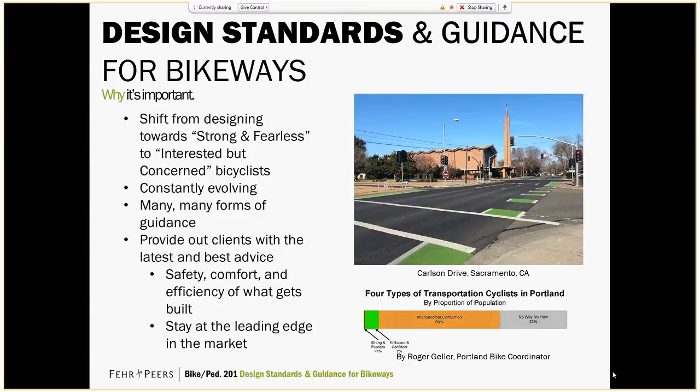Thanks, Charlie. I did want to start out by talking about what the design process is, and how do we go from something that's proposed in, say, a master plan or a specific plan that starts out at a very high level, to how that actually gets put onto the ground. So you start out with a proposed project that doesn't have a lot of detail, but the general concept is understood in, say, a bicycle master plan or a general plan. But then that needs to be taken to the next level and really look at more of the details and start figuring out what that means.

That's really where we talk about conceptual design. These days, a lot of times we'll include some conceptual designs in our master plans. The idea is that we make these more implementable and more focused on projects that can be put into place. The concept plan is usually defined by an Illustrator-type graphic as opposed to, say, an AutoCAD drawing. So it's a higher level, not necessarily to scale, done over the top of an aerial. But it does start to get into more of the details than are just outlined in the broader plan. The major elements are decided in this phase—you'll usually see cross sections identified, and some of the intersection treatments start to be looked at.

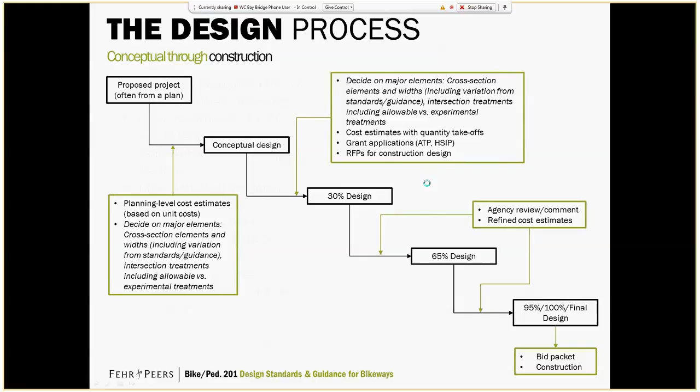So in theory, I have control. We'll see if it moves forward.

Okay, so this is just, again, an example of the concept design—you can see the illustration here. This is from a project on Telegraph Avenue in Oakland that we took all the way from the planning stages through to construction documents. Here it's really just an Illustrator document. You've got some of the cross-section elements called out, so you know how wide this thing is going to be and that it will fit within the curbs. But otherwise, it's pretty general, very illustrative of the concept that you're trying to convey to the public—that's important, that these graphics communicate that to the public. At this stage, you might include things like bike boxes, and we'll get into all these details later, showing crosswalks. It's somewhat vetted in terms of whether this is going to work, but not to the level that you need for the 30% design.

So 30% design is really when we pull it into AutoCAD and start to scale everything off, do all the tests that we need to make sure this is going to work, really start to ground truth this and make sure that everything can be accommodated where we think it can. It's when we start to get into a higher level review with the agency and make sure that they're comfortable with all the things that are being proposed.

Really start to look at conflicts that could be existing. So this is when you start to look at, is your curb ramp that you've proposed actually going to fit where you are saying that it should? And again, this is where you swap out from more of a figure type title block that gets stuck into a report to more of a construction document type title block that you'd see in a set of plans.

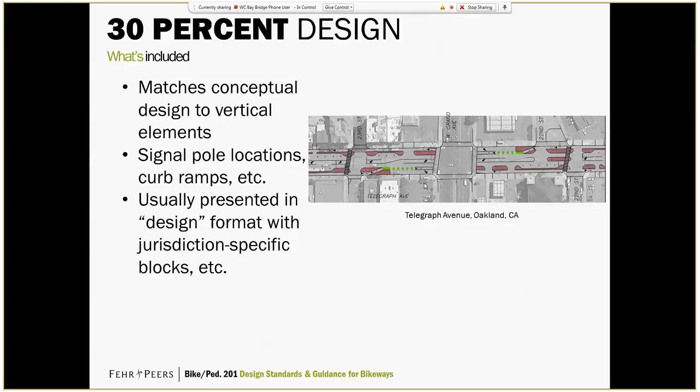From there, it would go into the construction documents, and there's usually several phases of this. Those are usually defined by the percentage, 65, 95, 100 final percent plans, and the package is usually, you'll hear the term PS&E, and that stands for plans, specifications, and cost estimate. And the plans are obviously the what is supposed to be built.

That's what most people are familiar with. The specifications are how that gets built, and it's really kind of the contract with the contractor, saying that you're going to build these things to this level, you're going to get paid in this manner by the square foot for sidewalk, by the linear foot for curb and gutter. That's all defined in the specifications.

And then the cost estimate is obviously how much the engineer is estimating that this is going to cost. And that gets turned over to the contractor, and the contractor bids on those specific items, and hopefully you're pretty close in your cost estimate.

And then, so that happens at the 100% or final design stage. A lot of these names change. Sometimes there's 3 final sets of plans, depending on when the agency starts to actually review it. And then once the project is completed, we get to the as-built, and that's basically a record of anything that was changed in the field once they built it, and then that's the final record drawings that the city stores and can be referred to later down the road if you want to change or update the project.

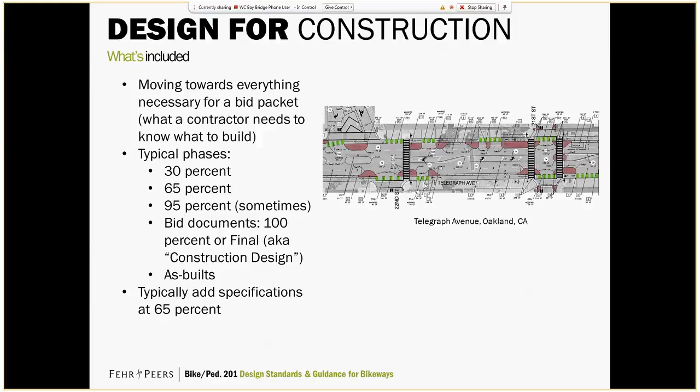Great, thanks, Ryan. So I think I can control it from here, even if you still keep control as well.

So, okay, so what's the difference between standards and guidance? Oftentimes those two words are used really interchangeably, but in fact, in the engineering world, there's actually a very different weight to each of those words, and that means that we have to use them very carefully. So a very general way of describing this is that standards are things that really must be followed, and you have to document it if you cannot follow that standard.

So we'll talk a little bit about the idea of what a design exception is in a minute, but that's something that we often hear, especially when working with state DOTs like Caltrans. Guidance is a lot different. Guidance inherently has some varying degree of flexibility in it. Guidance is information that might not apply in all situations, but it's there to guide you when the situation is relevant.

And usually you don't have to require, or you don't have to document exceptions to guidance, because it's guidance. You didn't have to follow it. You just chose not to. So obviously that depends from jurisdiction to jurisdiction, but generally less strict than standards.

So a really simplified example of this is the way that the Manual on Uniform Traffic Control Devices, the MUTCD, describes stop signs. So the MUTCD is very prescriptive in its language of what is the standard versus what is guidance. So for example, in the MUTCD, a stop sign shall be octagonal, shall have a white legend, shall be red. All of those very straightforward things that if we didn't do those things, it's very likely that the design would not function safely or as intended if the stop sign was green and round, for example.

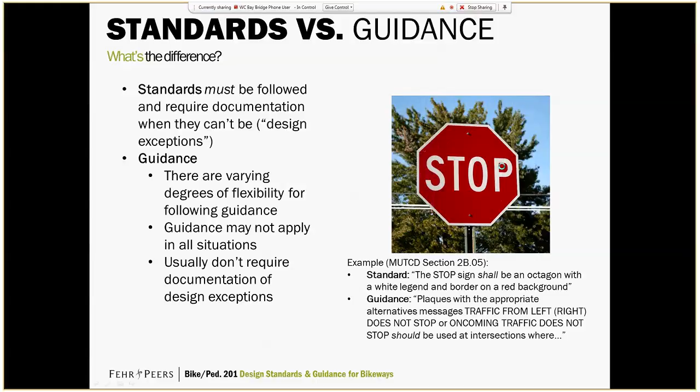So when we talk about standards, what constitutes what is a standard versus what is guidance? There's really two ways of making something a standard.

There's standards that have legal standing. Typically the ones we see with legal standing are the standards for traffic control devices, like the Manual on Uniform Traffic Control Devices, the MUTCD. This is actually referenced in California Vehicle Code. CVC section 21400 requires that Caltrans develop uniform standards and specifications for all official traffic control devices. Vehicle Code 21401 specifies that only the standards developed by Caltrans shall be placed on a street or highway by all the jurisdictions in the state. So that's requiring all the cities and counties in California to use the MUTCD.

It turns out that all of the states where we have offices have similar legislation referencing an MUTCD. Colorado in their revised statutes, Utah in their code, Washington in their revised code, and Washington, D.C. has this in their municipal regulations.

So that's the first way something can become a standard. The second way is how geometric standards often come to be standards instead of guidance, and that's when they become adopted by a jurisdiction. In California, Caltrans adopts the Highway Design Manual as their standard on the state highway system. Generally, off the state highway system, the Highway Design Manual is guidance, not standard, but on the state highway system, because it's adopted, it is standard.

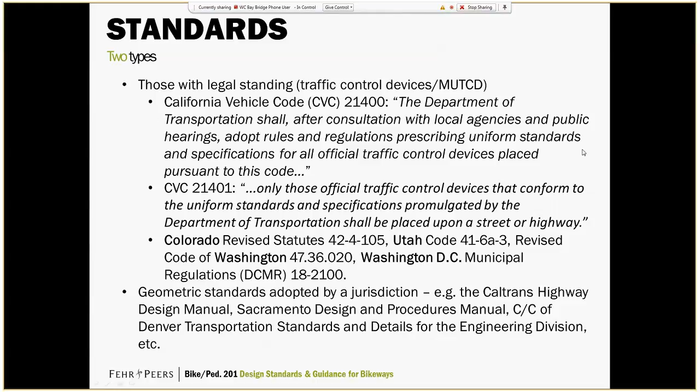Guidance is a little bit different. There's many different forms of guidance, and usually these don't have any standing as having been adopted by a city or agency. They're just out there, and we use them primarily to make sure we develop designs that are safe, function well, are efficient, and also to shield ourselves from liability. If we're using design guidance when we develop designs, it's much safer if there were to be a civil suit on that facility—we can say we followed this form of guidance when we designed this, therefore we don't think this claim has a reasonable basis.

Ryan and I describe these in three different forms, the first being the mainstream traditional forms of guidance. This would be things published by AASHTO, the American Association of State Highway Transportation Officials, either their Policy on Geometric Design of Highways and Streets, the Green Book, or what we call the Bike Guide, their guide for the development of bicycle facilities. Off the state highway system in California, we would typically call the Caltrans Highway Design Manual a mainstream traditional form of geometric design guidance.

Then there's this mainstream innovative category. This would be anything published by NACTO, the National Association of City Transportation Officials, either their Urban Bikeway Design Guide or their Urban Street Design Guide. This is also where we would categorize the CROW Design Manual for Bicycle Traffic. CROW is a Dutch nonprofit, a quasi-governmental organization that publishes the various design manuals for transportation and infrastructure used in the Netherlands. I think CROW is an acronym, but I'm not actually sure what it means, but that would fall within the mainstream innovative category. There are several other recommended practices we won't go through here that could also be used as forms of guidance.

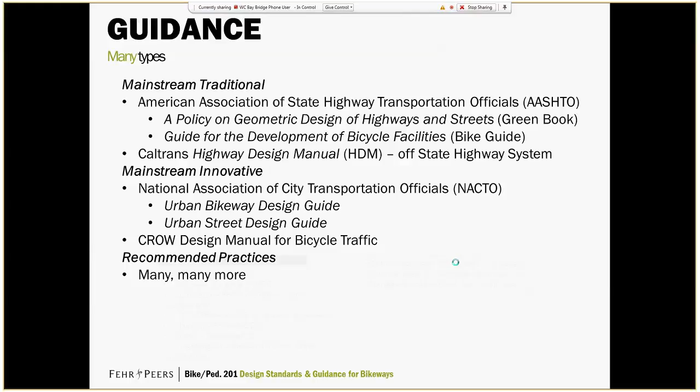So these are the two standards that, at least in California, we're most accustomed to seeing. Other states are certainly accustomed to seeing the MUTCD as well—on the left being the Manual on Uniform Traffic Control Devices. There are a few different ways this is developed and then implemented in different states. Some states take the version published by FHWA and adopt it in its entirety. Hawaii is an example of a state that does that.

Some states take the FHWA MUTCD and add a state supplement onto it, then adopt that version—that's what we do here in Colorado, and what they do in DC and Washington. Some states actually take the FHWA MUTCD, do a thorough editing and redline job on it, and then adopt that as a state MUTCD. That would be the California MUTCD or the Utah MUTCD.

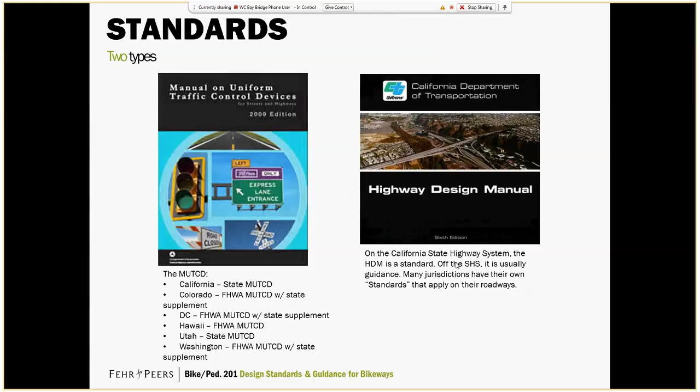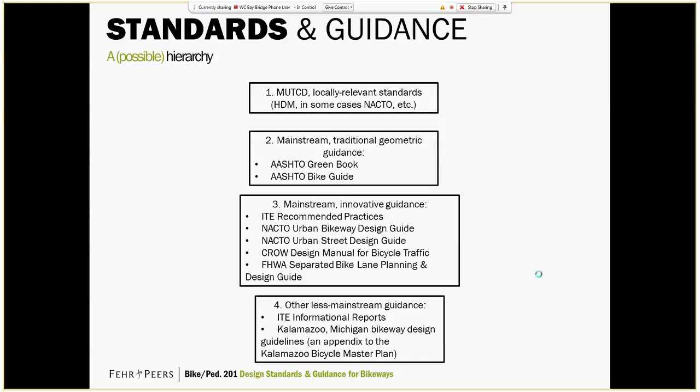So flexibility in design is actually handled in many, many different ways. The MUTCD is pretty prescriptive in how it defines flexibility, and it uses very clear and specific language. All the traffic control devices in the MUTCD have language of whether it's a standard, using the 'you shall do this' language, versus whether it's guidance, 'you should do this,' options, 'you may do this,' and then support. So it's pretty easy to identify what you have to do versus what you should or may do in those situations.

Geometric design flexibility is usually provided in the form of design exceptions. So in California, on the state highway system using the Highway Design Manual, there's a very formal process you have to go through if you're going to deviate from it. That's certainly drawn the ire of many engineers over the years, since oftentimes whether or not you need to pursue a design exception on the state highway system is reason either to or not to pursue a design.

Off of the state highway system, the process of getting a design exception is really less formal and depends on the jurisdiction. Really all they're looking for you to do in most cases is to document engineering decisions made, providing a clear written record of why you've decided to do something different than the guidance typically recommends, so that if there ever was a civil suit, they could go back to the file, the as-builts, and say, here's the record of why we decided to do it this way. Hopefully that's what shields them in the court of law should there ever be an accident on the facility.

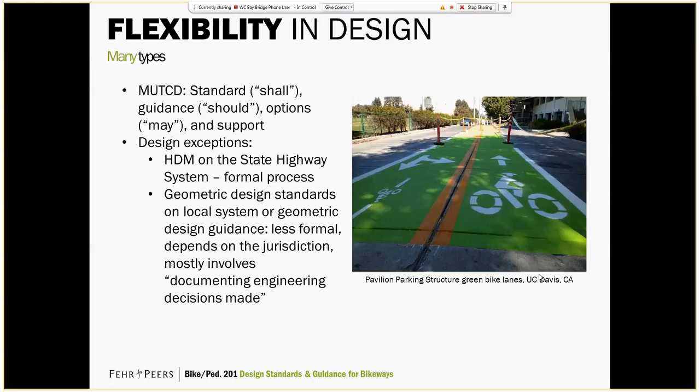So I mentioned that bikeway design is something that's constantly evolving, and the status of various devices in the MUTCD is a really good example of that.

Traffic control devices can either be allowable, meaning they can be implemented with existing MUTCD standards and guidance as is, or they might have interim approval, meaning they haven't yet made it into the MUTCD but have been approved by FHWA in the interim.

They might be subject to experimentation. This is the process used to determine whether a device should receive interim approval and be included in the next iteration of the MUTCD.

FHWA will issue official interpretations. This isn't really saying whether something is allowable or disallowable, but formal letters written by FHWA clarifying how the MUTCD should be interpreted. And then there are devices that are disallowed—specifically disallowed by FHWA and the MUTCD.

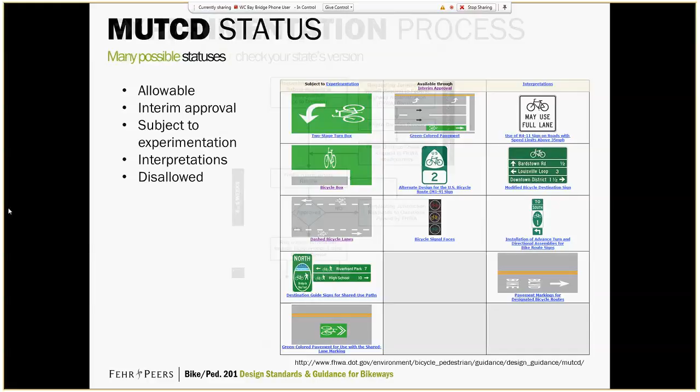I mentioned that a lot of devices are subject to experimentation. FHWA and many state DOTs, including Caltrans, have official processes for experimentation and have committees that review those experiments to determine whether or not they've been successful.

This is really the formal process through which new devices can either be allowed, disallowed, or included into the MUTCD. In general, the process includes submitting a request to FHWA and possibly your state DOT, including a statement discussing the need for the new device. FHWA and/or your state DOT will review that request, and if permission is granted, you can install the device.

Some important things I always caution my clients on: if you're going to request to experiment, they're going to require that you evaluate that experiment over a period of one year, and you actually have to provide a detailed evaluation plan in your application.

So there's some effort involved in the experimentation process, and ultimately that evaluation is what informs whether or not it should be an allowable device in the future. You also have to agree to restore the experimental site to its pre-existing condition if they find it doesn't work well and don't want to allow it going forward. So that's generally how the process works.

Usually experimenting with new devices—some jurisdictions are really excited to do it, but in most cases jurisdictions haven't wanted to because they don't want to incur the extra cost. That's my experience at least, but it's a little different depending on where you live and work.

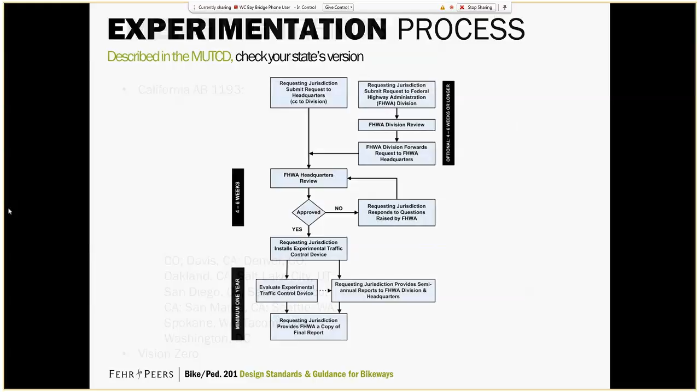Some emerging trends in bikeway design we wanted to talk about: first, in California, is Assembly Bill 1193. Prior to this, there were only three types of bikeways officially recognized in the state. This created a fourth classification, Class 4 bikeways called cycle tracks, and also required Caltrans to develop design standards for them, as well as lifting a previous requirement that jurisdictions only use the Highway Design Manual when designing bikeways off the state highway system.

Getting rid of that requirement actually made it possible to get various innovative devices, some of the stuff we see in NACTO, funded through state-specific funding sources like the Active Transportation Program.

NACTO endorsements are something we're seeing more and more frequently throughout the United States. Some of the states we're working in have officially endorsed the NACTO guides, as well as many cities. There's really varying degrees of weight with these endorsements as to what they mean.

I know Caltrans and the city of Denver both endorse the guide, but they don't really know what that means, and they still use their standard forms of standards and guidance. Whereas I think it's Modesto in California that has actually adopted the NACTO guide as their standard and uses it as such. That's a little more rare than the ambiguous endorsements where they have to reckon with the meaning. But it's good to know and ask those questions when working with clients in any of these cities.

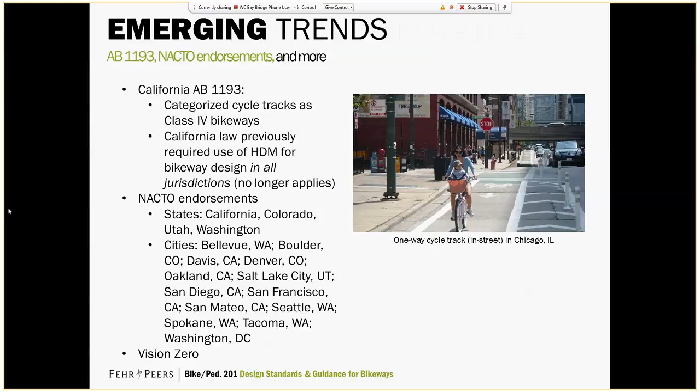All right, so now we're going to get into the details of what these facilities are and what it really means to do innovative bicycle facility design. As Charlie said, this is a rapidly evolving field, so we're just going to start off by talking about some of the traditional bicycle facilities. These are the ones you see all over, they're in the traditional guidance, they've long been approved. We'll go over those briefly, then get into more of the innovative treatments along the corridors, and then talk about the innovative intersection treatments that go along with those.

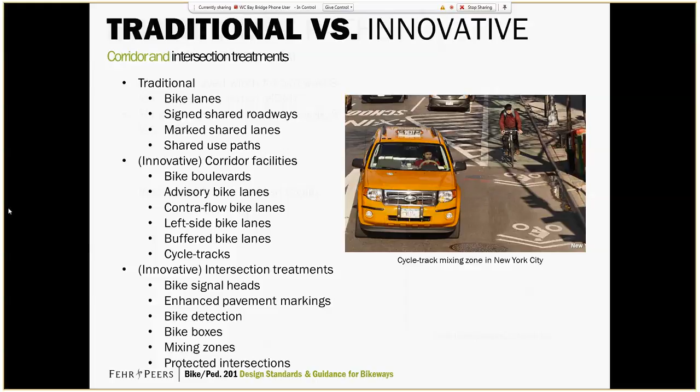The minimum width as defined by the Highway Design Manual is 8 feet for a two-way, 10 feet is preferred, 5 feet for a one-way, and then a 2-foot shoulder on either side. The other requirement is that if it's running alongside a roadway, it must be separated by 5 feet minimum. This has actually caused a lot of trouble in terms of putting down side paths along streets with limited right-of-way, and getting that 5-foot separation is actually a difficult thing to do.

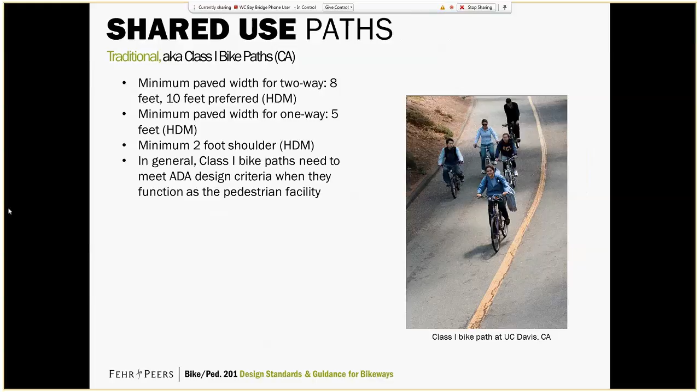And then the Class 2 by Caltrans is the standard bike lane. This is often just the single stripe on the road that we've long seen, along with bike lane stencils designating that as the bike lane. The minimum is 5 feet with the gutter, or 5 feet with on-street parking.

Now this is the minimum, we don't recommend the minimum. We say at least 6 feet, especially when you're adjacent to on-street parking, it just becomes too tight of a space with the door zone, people opening their door into it. And then also a maximum is 7 to 8 feet, and that's really because once you get above that, it starts to look more like a vehicle lane, and you don't want vehicles driving down the bike lane. It also can lead to people parking in it, thinking that there's still enough space for bikes to sneak by if I park in a 9-foot bike lane. So that's why we have that maximum there.

To address the door zone issue, different jurisdictions have tried different things. One of the most common ways is to use parking tees instead of parking ells, and that's where you see the piece of the parking tee sticking out into the bike lane. It sticks out 2 feet in general, and that is a reminder that you need to ride away from that door area so that someone doesn't open the door into you. Now, 2 feet is not really a sufficient space, so again, that's why we push for the wider bike lanes to allow enough room there. Another way is to add that second stripe along the parking lane and really try to better define the difference between the parking area and the bike area.

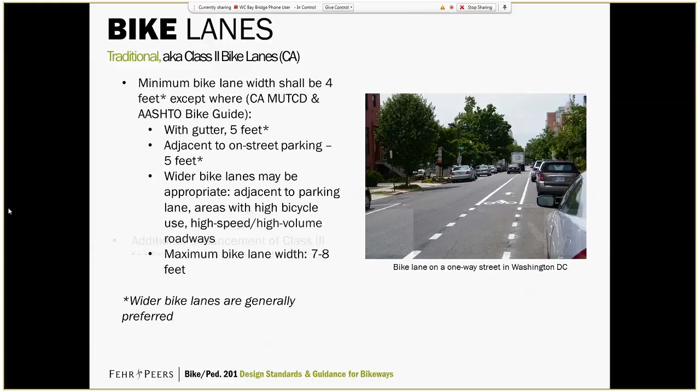And then we get into what's known as Class 3 bike routes in California, and that's really just traditionally where you put up some signs that say bike route. The green signs that just show wayfinding or that say bike route, but really nothing else. And the effectiveness of just putting up signs that say bike route in terms of motorists understanding that they need to be sharing the road with bicyclists is questionable.

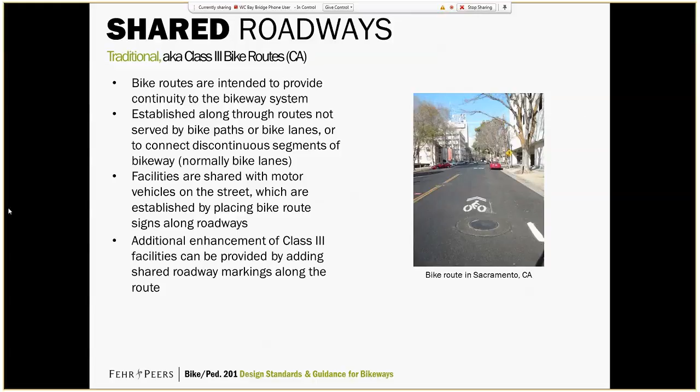So along with the bike routes came the shared lane marking, and so then at least we got some sort of striping designation on that to remind motorists that this is also where bicyclists need to be or are allowed to be. But again, this is not for those interested but concerned riders. This is for the strong riders that are comfortable sharing a lane with traffic.

It's often been used as a gap closure, the Sharrow designation there, but that's really a way to stress interested but concerned riders out, by dropping them from a nice bike lane into a shared lane with vehicles. But it's still often used for that.

Our guidance, well, the MUTCD says this needs to be placed 11 feet from the curb when you've got parking. That basically puts you out of the door zone, questionably out of the door zone. More than 11 feet is always preferred. And really our guidance now is to put the Sharrow marking in the center of the lane, because there's not enough room for vehicles to pass a bicycle if it's pushed over to the side.

So have the bicyclist take the entire lane. Motorists can pass when there's a second lane or if there's a passing area. So that's kind of how the Sharrow practice has evolved. It also goes along with the 3-foot law in California that just went into effect, where motorists have to give 3 feet clear to bicyclists to pass them. So putting the bikes over to the side with a Sharrow kind of encourages motorists to try and stay in that one lane, and so it doesn't really support that 3 feet either.

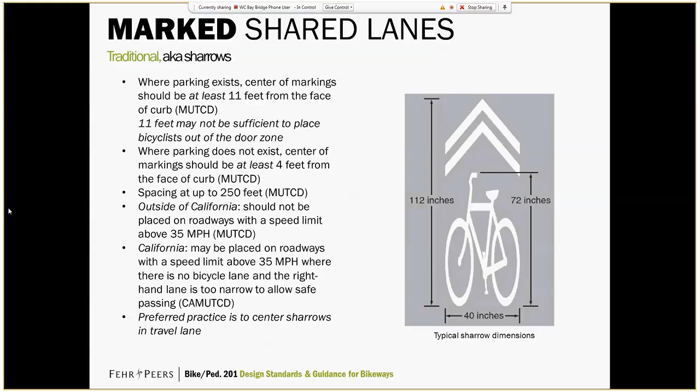There's also the use of green-colored Sharrows, and there's a couple examples here. The one on the left is a continuous green space, with Sharrows placed intermittently along there. This is under experimentation in several locations, including Oakland, which we've been involved in. Carrie Nielsen has been extensively involved in the experimentation process with this. But no more experiments are being allowed under this. And it's looking like it doesn't make a huge difference versus just a green-back Sharrow. But then the green-back Sharrow is still allowed under experimentation, and it really emphasizes that Sharrow, really brings it out.

It's good when transitioning from a bike lane to a shared lane, that situation we're trying to avoid, but it really helps make that a higher emphasis. Also, where there's higher vehicle volume, it is a good indicator.

Again, the second benefit of Sharrows is they can provide guidance when bike routes change from one street to another, make the turn. So it's really good to give that guidance. Here you can see it's shown in a left turn lane. The bike route is turning left, so it's a good indicator that that is what is happening there.

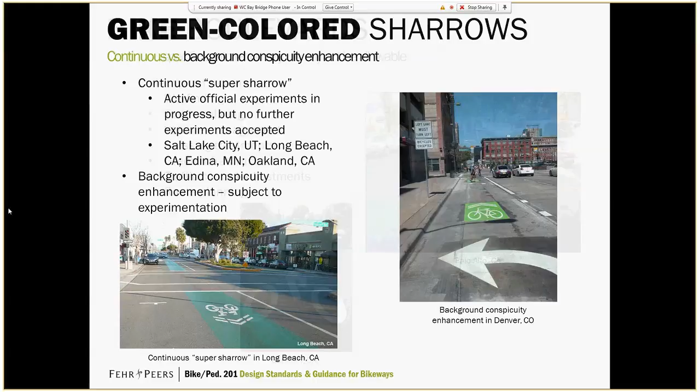Another innovative treatment building off of the shared roadway treatment is the bike boulevard. The idea behind bike boulevards is that you're choosing streets that don't have a high vehicle volume, don't have high vehicle speeds, that are more comfortable for a general use bike facility. They can be accompanied by the large stencil you see on the left—that's in Berkeley, really takes up the entire roadway. Or some jurisdictions like Palo Alto just like to stick with the standard Sharrow.

Bike boulevards are really a combination of wayfinding, traffic calming, volume management, crossing treatments, traffic control adjustments, which I'll get into, and route planning, all combining to get the traffic volumes and traffic speeds down to where they should be and make it more comfortable for bicyclists.

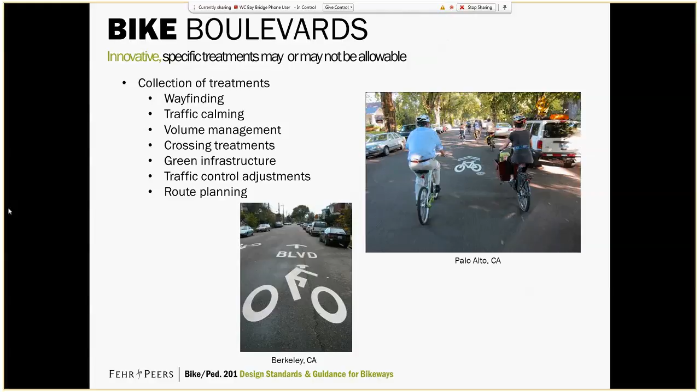Some rules of thumb for bike boulevards: you want an average daily traffic volume of less than 3,000 vehicles. You want the 85th percentile speed, which is what we usually use to set speed limits—it's a good measure of the general speed on the roadway—to be less than 25 miles per hour.

You can accomplish both of those things by implementing traffic calming measures such as traffic circles and medians and that sort of thing. Partial closures are often used to divert traffic away from that bike boulevard.

Traffic control device orientation: you don't want a bunch of all-way stop signs or even two-way stop signs along your bicycle boulevard, because we all know how difficult it is to stop on a bike, come to a complete stop and start riding again, especially when there's no cars on the side street. So flipping the stop signs to the other street is often a treatment, as well as using a traffic circle or mini roundabout. Those are great for allowing bikes to continuously move through the intersection.

Flipping stop signs can often be controversial. People see stop signs as a traffic calming measure on their street. So when you stop stopping traffic along their street, they see that vehicle speeds are going to go up. You really need to accompany that with some sort of traffic calming measure, such as speed humps, to slow down that traffic that now won't stop.

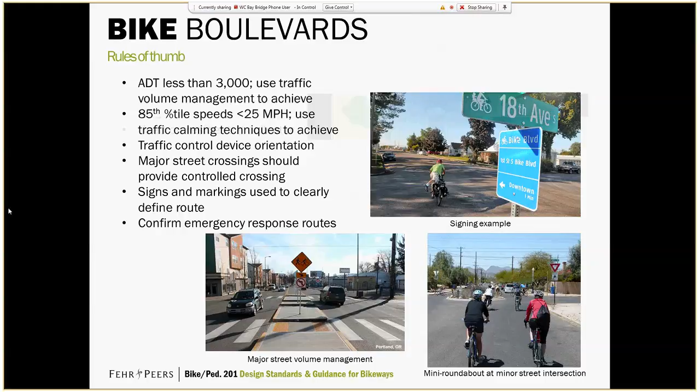Another innovative treatment is the advisory bike lane. This allows you, when you have higher volumes than 3,000, to use it in volumes of 4,000 to 6,000, separating bicycle and vehicle traffic while acknowledging there's not enough width for cars to pass each other without going into that bike lane.

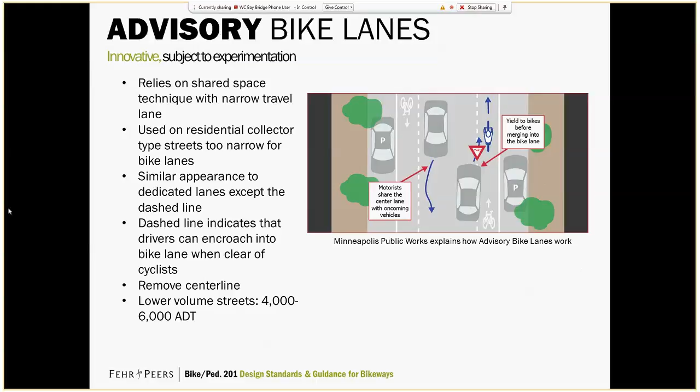Here you can see it's a solid line up against the parking, but a dash line for the travel lane, and you remove the center line. This is similar in appearance to dedicated bike lanes, except for that dash stripe. The idea is that bicyclists are allowed in those lanes, but if a car approaches, it has to yield to the bikes, and if they need to move around an opposing truck or vehicle, they do that once the bike has passed.

Here's the dimensions we recommend: 5-foot minimum, 7-foot preferred for the bike lane; 14-foot minimum, 18-foot preferred for the vehicle travel lane. If you think about the 14 feet, that's 7 feet in each direction—cars are going to have trouble passing each other without crossing into that bike lane. At 18 feet, cars can get past each other pretty easily, but if a large truck came down the street, the opposing traffic would have to go into the bike lane.

The example I like to mention is narrow residential streets where parking is allowed on both sides, meaning two cars can't get past each other in the space that's left. One car will often pull over behind a parked car, allow the other car to pass, and then pull out and continue. The advisory bike lane operates similarly, except that there's space for bicyclists.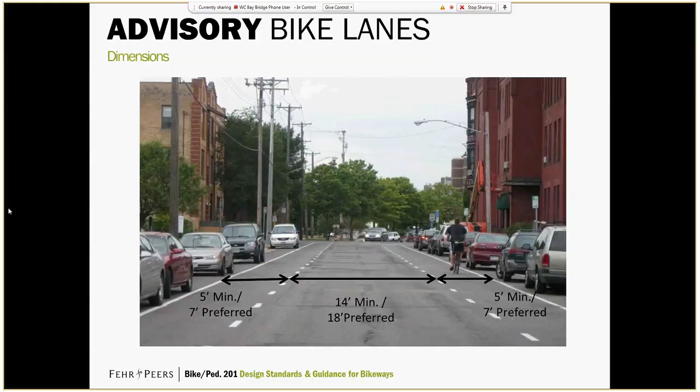The next one I want to talk about is the contraflow bike lane. This is where you have a one-way street but want to allow bicyclists access in the opposite direction. It's often used as a gap closure when there's not a direct route for bicyclists, or an alternative route, and you want to get them to the other side of that one-way street.

It works similarly to a vehicle lane because you're just putting down a centerline stripe and allowing two-way bicycle traffic. You need to place do-not-enter signs along with bikes-excepted signage. It's not specifically addressed in the MUTCD, but it is in the California MUTCD, so it is an allowed treatment.

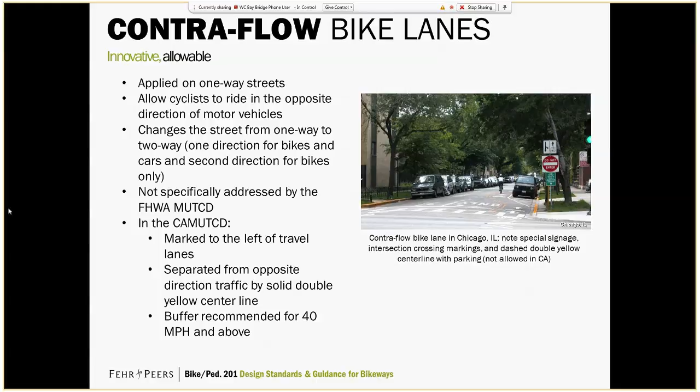Another innovative treatment is left side bike lanes. These are great when you've got a one-way street or a street with a median—you can also put them up against the median. They're great for separating bicycle and bus conflict. If there's a lot of frequent bus stops, the interaction between bicyclists and buses pulling over creates the leapfrog effect, where you pass the bus when it's stopped, the bus passes you after it leaves, and that continues all the way down the road.

So this just removes that situation by putting the bikes on the left. It's also good if there's not parking on the left side, and you do have parking on the right side, so you just move the bikes to the other side of the street, eliminating that conflict.

Near interchanges it's somewhat useful too. If you've got high-speed entrances onto freeways, you can just remove the bikes from that movement. It's easiest on one-way streets, but we've seen it implemented on two-way streets with a median, or adding basically a center-running bike lane.

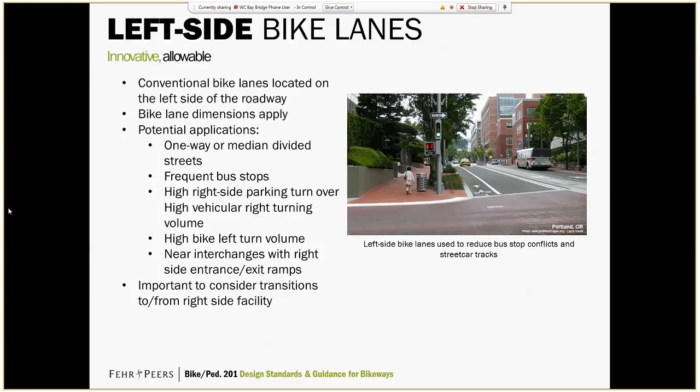Another one we're seeing more and more now is the buffered bike lane, where you add a striped buffer space between the bike lane and the travel lane, or between the bike lane and the parking lane, or both.

On the parking side, it continues to help eliminate the door zone issue, and on the other side it provides extra comfort, especially with higher speed traffic. The other big benefit is if you have extra width, say you're taking away a vehicle lane, and you want to avoid adding a greater than 8-foot bike lane, you can stripe out a buffer, and it's pretty obvious that's not a lane vehicles should be traveling down.

Our recommendations are that the combined width of buffer and bike lane should be a minimum of 6.5 feet, and the buffer itself should be a minimum of 18 inches.

Once you get beyond 2 feet, you want to start adding diagonal stripes to really make sure that's understood to be a buffer. Both diagonal and chevron markings can be used. With wider buffers, you want to use chevrons when bikes and cars are going the same direction; the chevron indicates vehicles traveling in both directions. And then you can see the width here.

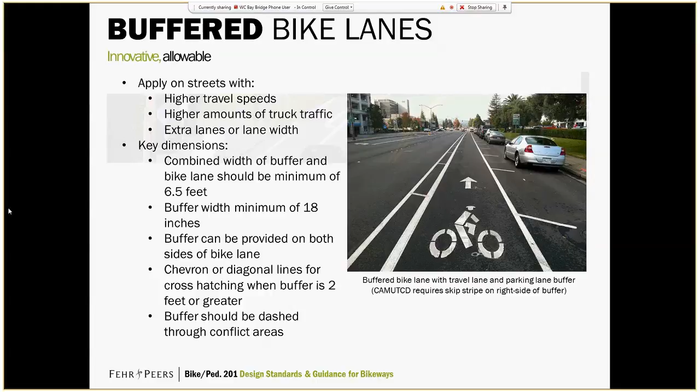Again, there's the extra width from the door zone. In this picture, it's not hatched out, and there's no second line defining that door zone. So if you really want to make sure cars don't park away from the curb and keep them over there, an additional stripe is good to include.

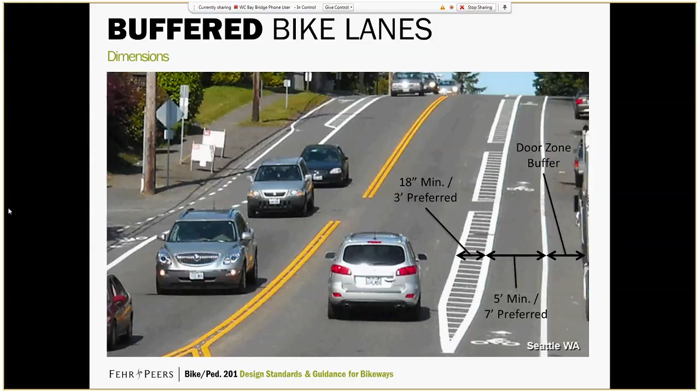All right, now getting into the really innovative stuff. One-way cycle tracks, also known as protected bikeways, are when you actually have some sort of physical separation between vehicles and the bike facility. So this goes beyond just a painted buffer and actually becomes something physical.

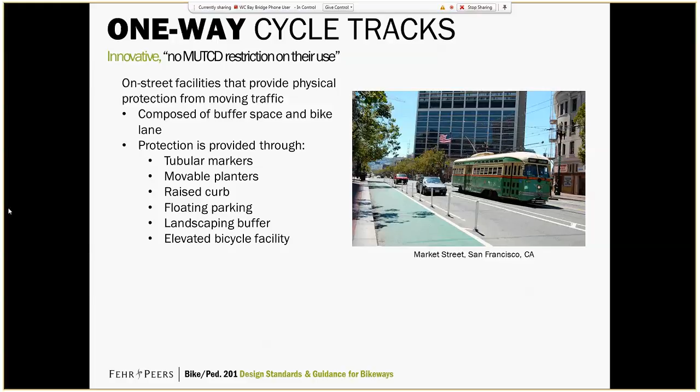The buffer space can be pop-up delineators, movable planters, or a raised curb. Parking is often placed between the cycle track and the travel lane, or a landscape buffer, and I'll show you some examples. This is taking it beyond just trying to get those interested but concerned riders out, and it's a great way to do it because it eliminates any sort of vehicle and bicycle conflict, except at driveways and intersections, which we'll get into.

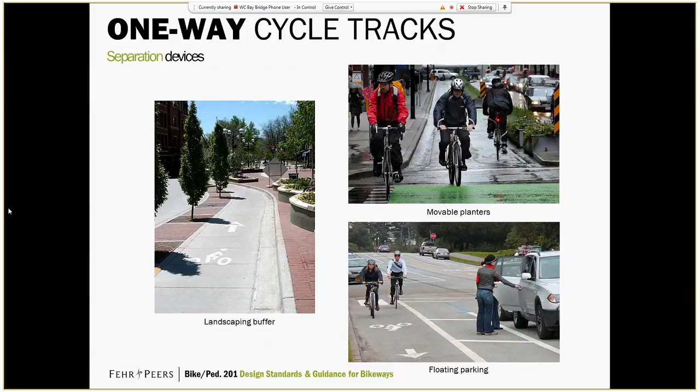So there's a lot of design criteria around these. For the bike lane, 5-foot minimum, 7-foot preferred, and really the larger is preferred because essentially the bikes have no room to pass each other. So if a bicyclist comes up on a slower moving bike, they're physically prevented from passing. Wider is good, especially in higher bicycle volume areas.

Driveway areas should be marked and signed. The buffer space should be 3-foot minimum, 4-foot preferred width, which is often the case when you've got parking to the left. You don't want to create a door zone issue on the left side of the bike lane by creating these cycle tracks. This gives enough room to open the door, load groceries, put the stroller away, that sort of thing with the 4-foot buffer.

And then there are some recommendations for the markers. Street sweeper and snowplow issues—snowplow not so much in the Bay Area, but for sure in Colorado. You're creating a narrow track, and street sweepers weren't designed to handle that, so you don't want an accumulation of debris in that cycle track.

That's actually worse for cyclists than for others. So you really need to talk to the jurisdiction's maintenance team and see if they're willing to get a narrower sweeper, which they've been known to do, or find out the minimum width needed between a physical object and the curb so they can come in and sweep that area.

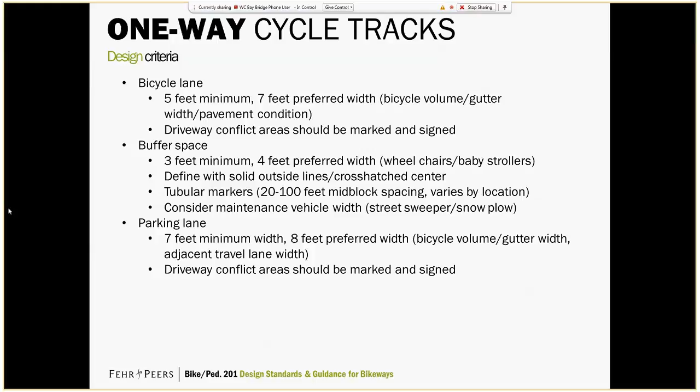And here's the dimensions shown for that we discussed.

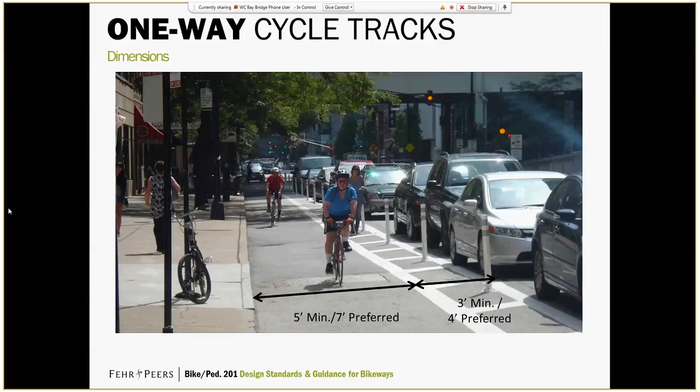Conflict at driveways, so that is an issue. You're now placing the bicyclists behind the parked cars, so cars turning into the driveway, their vision could be blocked. So we do want to consider the sight triangle as you approach the intersection.

10-foot sight triangle at driveways is what we recommend, 20-foot sight triangle at minor street crossings, and that's in the NACTO guidelines.

The other line of thinking though, behind this, is that if you have a fair amount of separation there, vehicles are actually able to make the turn almost fully before crossing the cycle track, so they have better alignment than they would with a bike lane right next to them. Essentially, they're looking towards their right instead of all the way over their shoulder to see if there's a bike coming. So by tightening that up, it can actually slow the vehicles down making that turn, and provide better sight lines between the bicyclist and the vehicle.

So there's some trade-off there, and consideration should be given to both. Also, making sure markings are provided across there to make sure vehicles coming out of the driveway know that they're crossing a cycle track and look for bicyclists.

In this example, they've got large bicycle stencils there. Also, this is a great place to put in the green skip striping to really highlight that, and even some directional arrows to show which way the bicyclist will be coming.

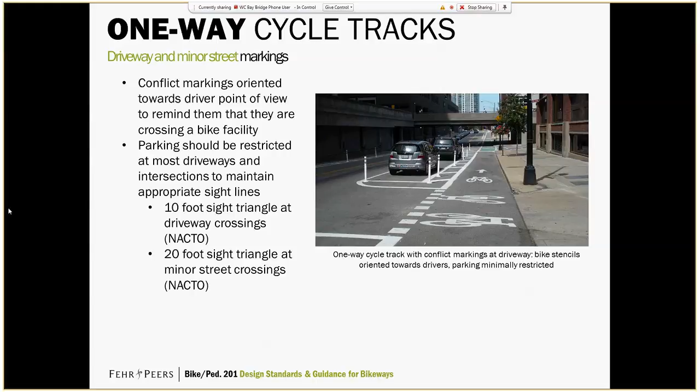Did want to mention raised one-way cycle tracks. These are often at the same level or maybe slightly below the sidewalk level, but then that brings them above the roadway level, just to further differentiate it. And then the vertical separation becomes part of your buffer space and your physical separation.

In this example, they actually kept the existing curb line along there and then just built out from that. And then the other thing to keep in mind with raised cycle tracks is the pedestrian bicycle separation. If it looks like sidewalk and is built like sidewalk, then pedestrians are likely to wander onto it. And one of the points of the cycle track is to make sure you keep that separate.

In this case, it's actually a good example of how they use the furniture space, so you've got trees, bike racks, really as a physical barrier separating the two. And then you've got different pavement treatment, so in this case it's a stamped concrete to help differentiate that as well.

In this example, the buffer there is a little tighter than we'd want. You can see that if that van opens their door, they're probably sticking into the bike lane. So still good practice to have at least that 3-foot buffer there. And then you can also have a mountable curb there, and there's some guidelines for that.

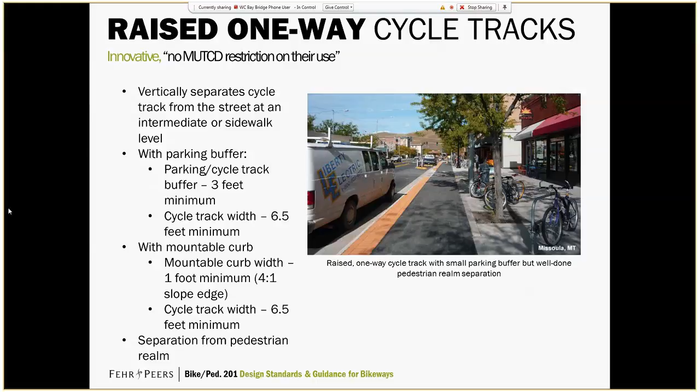So the natural transition from one-way is to two-way cycle tracks. These get more complicated because now you have bicyclists traveling both directions where cars don't necessarily expect bicycles to be traveling both directions. But they're good on one-way streets, so it acts almost like the contraflow lane does. And then it's also appropriate where you have limited interruptions. So say you're along a waterfront and you don't have intersections coming across there, then that's a great place for a two-way cycle track.

At larger intersections, there's special consideration for intersection treatments with two-way facilities because of the additional conflicts you have with opposing bicycles and vehicles. So Charlie will talk more about that, but where you have that additional space it's usually more appropriate.

Some of the benefits of them are you don't have to have two buffers. Say you had one-way cycle tracks on both sides of the street, that means you're doubling up on that buffer, it's taking up more width. So when you don't have that width, you just need one buffer in this case. It also alleviates some of that passing issue because basically you could have a broken yellow line so bicyclists could pass each other when it's safe. So for width considerations, it can help with that.

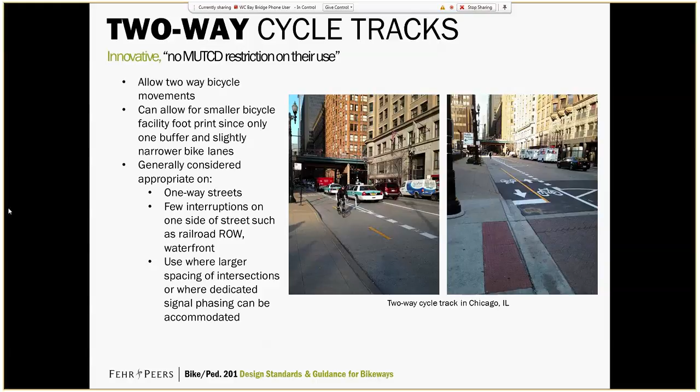Some criteria on this: 8-foot minimum, 12-foot preferred width. Again, dashed yellow center line to separate directions. Driveway treatments are especially important with these. Maybe some additional signage that reminds drivers to look both ways when they're crossing it. Parking lane and buffer lane are similar to one-way cycle track.

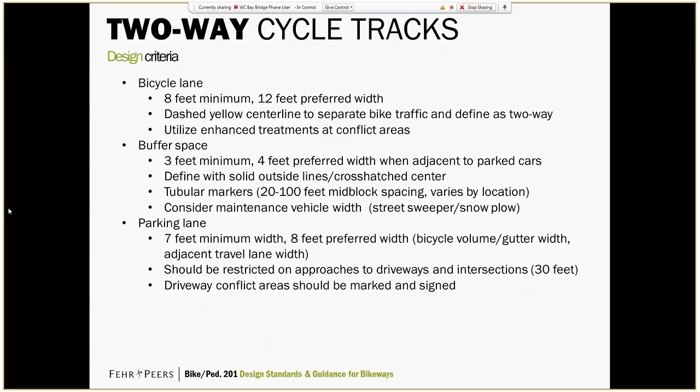Although the sight triangles are more of a concern because you need to consider left-turning vehicles off the main street with bicycles coming the same direction as them, it's just not a common movement for cars to consider when they're turning into locations. So you want to consider expanding your sight triangles, especially at unsignalized locations where you can't separate it through special phasing.

So that's the wrap up of the corridors. Now we're going to get into the more difficult part, the intersections.

Okay, thanks Ryan. I'll take us through the next 15 minutes or so and then wrap up with Q&A. I'm going to talk through various intersection treatments, the first being intersection crossing markings.

There's a lot of different allowable treatments for intersection crossing markings. In general, we're trying to increase bicyclist visibility and clarify bicyclist right-of-way and positioning through the intersection. This shows a few different ways of doing it, all allowable. The one on the top left is from Chicago, using green-colored pavement through that conflict zone. On the outside, they use what we call elephant's feet - a white skip stripe, but a bigger, blockier, more square striping pattern than typical skip striping, actually a 1 foot by 1 foot square. You can see the bike stencils oriented towards drivers as they enter and exit the minor street, and in the center you can see the skip stripe double yellow. All devices on this one are allowable.

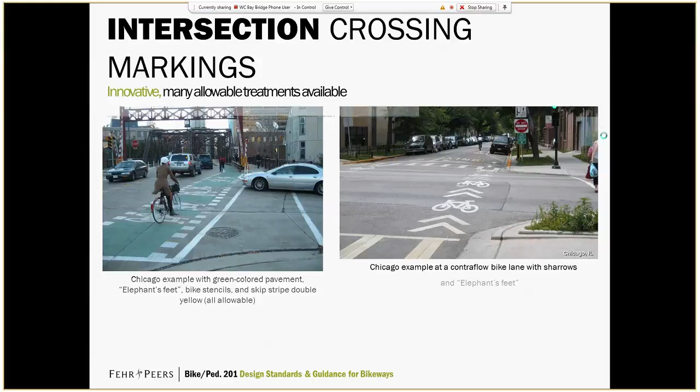The next device is using shared lane markings in exclusive turn lanes. This is something we'd typically define as innovative, and it's also allowable. Oftentimes we use this when there isn't sufficient width for both a standard bike lane and a right turn lane. The absolute minimum for both a standard bike lane and a right turn lane is 14 feet. In that case, it might be preferred to use both a 5-foot bike lane and a 9-foot right turn lane. That really depends on your vehicle fleet making that right turn - if you have a lot of trucks, 14 feet might not be enough for them to make that turn and stay within their lane, but if you're mostly passenger vehicles, that might work okay.

The idea here is that the bicyclist stays to the left side of the right turn pocket, which is naturally where they want to be aligned to get into the bike lane on the far side of the intersection. It also means they don't have to mix with vehicles in the through travel lane, which are usually going at a higher rate of speed through the intersection. The one on the right is the example of shared lane markings in exclusive turn lanes, which is allowable. I've heard there's a lot of the combined bike lane turn lane on the bottom, where they use dash striping within the right turn pocket. That was officially disallowed by FHWA, so it's not something we recommend anymore, but it is in the NACTO Urban Bikeway Design Guide.

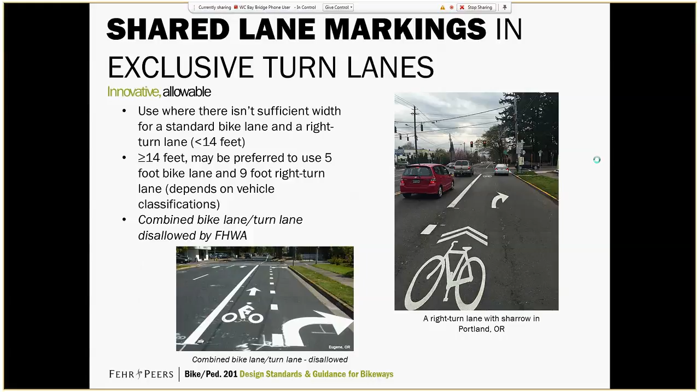Ryan and I have been talking a lot about the green colored pavement, so I want to talk a bit about our recommended practice for how that's used. There's actually been research done on this that shows that marking conflict zones with green paint is an effective way of getting drivers to yield. They're more likely to yield when they're diverging across that conflict zone versus when they're merging.

However, green paint is expensive to maintain and it wears off really quickly. So what we usually say is that what makes the most sense is to use it where you most need it, in the conflict zones. And there's also a law of diminishing returns on this. If you mark all the bike lanes green, people kind of tune that out and stop paying attention to it. So we really encourage people to use it where they most need it.

It's important to caution that green pavement itself doesn't make up for poor intersection design. So we're always encouraging jurisdictions to make the harder decisions that involve designs that really slow drivers and naturally clarify the bicyclist right of way.

This example is kind of our recommended use of skip green in conflict zones, where you can see in the various conflict zones where vehicles would be expected to either merge or diverge through the bike lane, we use the skip stripe, versus areas where bicyclists have exclusive use of that space, we use the solid green. So that's kind of how Ryan and I are typically trying to design green bike lanes when we're doing so.

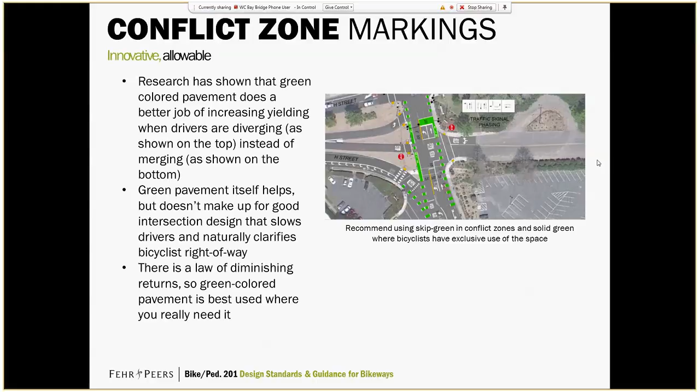Bike boxes are an innovative device subject to experimentation. The intended use of bike boxes is to reduce the risk of right hook collisions. This is a collision where a bicyclist in the bike lane against the curb is traveling through and a vehicle turns right across their path. They can be very serious collisions. People can get very seriously injured, and there have been fatalities because of right hook collisions. So there's a lot of hope that these devices will help reduce those.

They can also help bicyclists with left turns when the bike box is positioned across the left turn lane. And they also provide bicyclist queuing space. So if you have high bicyclist volumes and they're all stacked up waiting at the red light, the bike box can provide them a little bit more space to stack.

Some of the basic design criteria: at least 10 feet deep, that's enough space for bicyclists to ride into it and rotate their bike a little bit and align themselves for when the light turns green. They always have the stop lines for drivers in advance of the bike box. No right turn on red is required with these in NACTO - there's a shall statement in there with those. So whenever we're planning these, we want to make sure that we're evaluating the trade-off of prohibiting that right turn on red when we do our operations analysis.

And then it's always important to make sure bicyclists can actually be detected from the bike box. So whatever your bike detection scheme is, making sure that that works for bicyclists in the box as well.

The green color itself is actually optional. Ryan and I have both heard mixed feedback on these. I've heard that they're good for bicyclists at the start of green in terms of reducing those right hook collision occasions. However, when bicyclists are entering or arriving on green, the vehicles still aren't necessarily looking in the bike box or looking over their shoulder for bikes. So I'm actually pretty interested to see if this is something that ends up getting approved in the MUTCD or not. I'm really not sure at this point based on the research that I've seen to date.

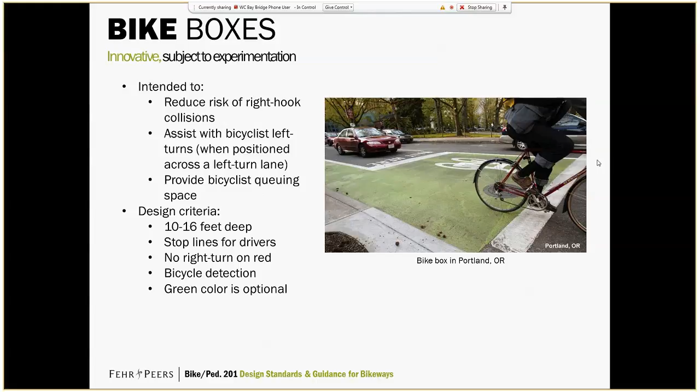Two-stage turn queue boxes are another innovative device subject to experimentation. These facilitate a movement that we call the Dutch left turn. The way this works, as I can describe here in the picture, is that bicyclists enter the two-stage box during the major street through green phase - here that would be the phase that the streetcar goes on. During that green phase, they rotate their bikes and then wait for the minor street to get its through green. When the minor street gets their green, bicyclists can proceed straight, essentially, and make their left turn in 2 stages.

At locations where they don't have these installed currently, a lot of bicyclists will use pedestrian push buttons at the crosswalks to make this movement. So really, the two-stage turn queue box just formalizes that movement and provides more space for it to occur in a more predictable way.

Some of the basic design criteria on these: minimum depth of 6 feet, which is basically just enough space for a bicyclist to stop and rotate and fit entirely within the box. The bike stencil and turn arrow are used to make it clear that that's a space where bicyclists are supposed to use for turning. If it's positioned in front of a right turn lane, then no right turn on red is required, so there's some operational trade-off there that may need to be evaluated. And then again, bike detection is important. The green color is optional in this case as well.

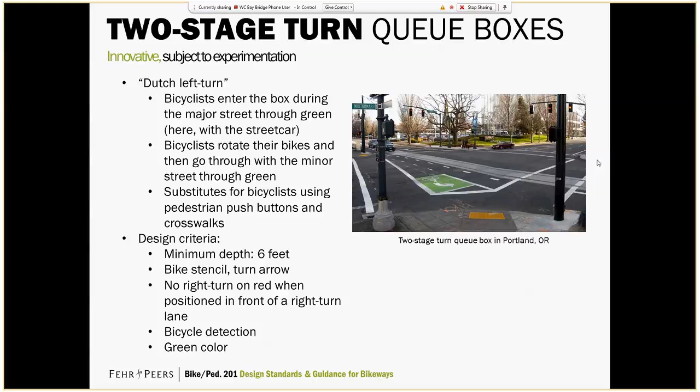Bike signal heads are something that we've been seeing for a long time in California. That's actually kind of the rare occurrence now where California, at least on traffic control design, is ahead of the curve. Everywhere else, these have interim approval from FHWA.

They basically consist of red, yellow, and green bike indication signal heads, and they're really useful when you're connecting a shared use path into an intersection, or when you're connecting a cycle track through an intersection where you need to have exclusive phases to keep the bicyclist protected from turning vehicles.

Some of the key interim approval requirements from FHWA are that you can only use these when there's no simultaneous conflicting vehicle movement. That includes permitted right and left turns. They don't want to give a mixed signal to bicyclists that they have a green bike and that they're not going to have conflicting traffic. So you can only use it when there's no conflicting vehicle movement.

FHWA does not require any warrants to install these. They really say if it's necessary for safety and to eliminate conflicting movements, you can do it. That's a major difference from the California MUTCD, which has a pretty high warrant for installing these. And for that reason, I'm pretty interested to see whether or not we eventually change that in California and drop that warrant, similar to the way that they have in FHWA's interim approval. And then the accompanying sign just helps bicyclists understand that they're supposed to follow the bike signal.

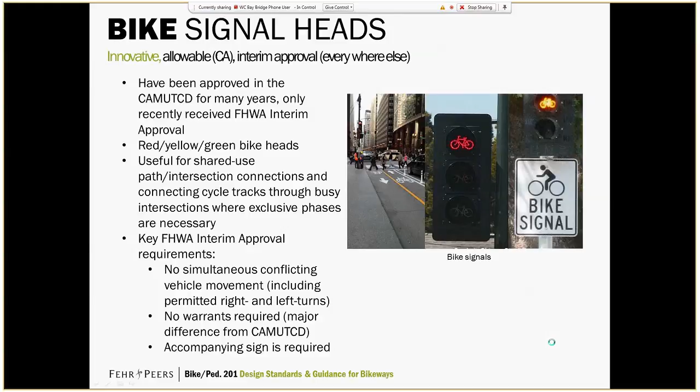Bike detection itself isn't actually a traffic control device, and there's many different ways of doing it, some traditional and some innovative. One way or another, it's just important that if we're providing traffic signals, bicyclists actually be able to get all the way through them. There's a lot of different ways to achieve that, either with inductive loops in the pavement, which is what we're showing here in the photo. Camera detection has been around for a long time, and some of the emerging technologies include things like radar and LiDAR, as well as thermal imaging.

If there's any rules on these, it's really just that they need to be intuitive. There's been research showing that the stencils alone are really not well understood. The signs that accompany the stencils, like we have shown on the top right, help with that understanding. But if it's not really intuitive that a bike needs to stand in exactly the right spot, they're probably not going to get it. I generally find, for that reason, that I prefer some of the less location-specific devices. So cameras, radar, LiDAR, and thermal are all better at sensing bicyclists in a general area versus having them lined up exactly on top of the loop.

Different technologies may be promising in the future in having an ability to actually differentiate between bicyclists and vehicles, or even bicyclists and motorcycles. That can be really useful if you want to provide certain special timings for bikes, like providing more green time when a bicyclist shows up versus when a motorcycle shows up, to make sure the bike can clear the intersection before the other street goes.

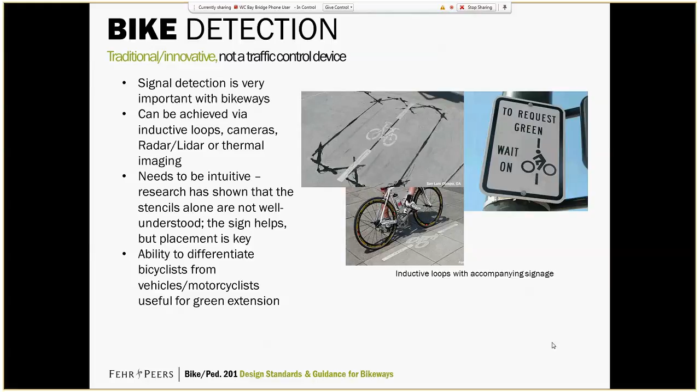Mixing zones are, in many cases, considered the weak link of cycle track design.

These are allowable treatments. They usually just combine various treatments that are already allowed. Basically, what happens here is that the cycle track approaches the intersection, and you need to provide some space for vehicles to turn across the path of the cycle track, and for that reason they create a mixing zone.

On the bottom right, you can see an example from New York City where the cycle track actually ends and you have sharrows through the turn lane. The cab is right on top of it here, but you can see in the CAD drawing that there are actually some yield lines there.

And then in DC on the left, you can see an example where they actually use the combined bike lane turn lane. This would be an example of a treatment that's technically disallowed by the MUTCD now. But the intention is that bicyclists can occupy that bike lane and vehicles are to yield right of way to them when they merge across that bike lane at the intersection.

The general rule of thumb I've heard in the industry is that mixing zones can maintain a reasonably high level of user comfort when you have less than 60 turning vehicles per hour. So pretty simple rule of thumb, one vehicle per minute. Anything above that, and you really need to start looking at exclusive phases to maintain the same level of user comfort through the intersection.

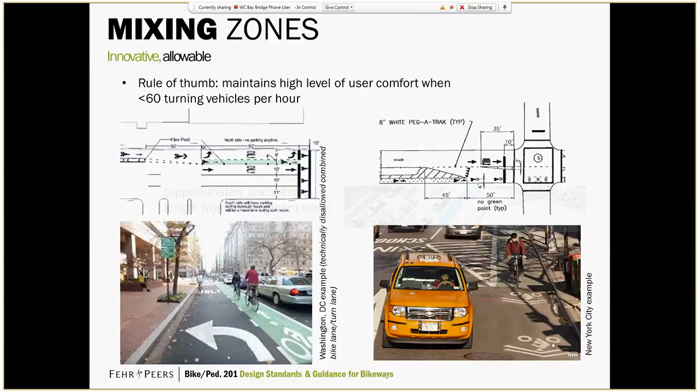Okay, closing it out with the protected intersection. This is something that's gotten a lot of buzz over the past year. This is an intersection design that's actually modeled after Dutch intersection design for cycle tracks approaching intersections. Some key features of a protected intersection that make it protected.

There are these little football-shaped corner refuge islands that place the bicycle stop bar well ahead of the vehicle stop bar at the intersection. That way, vehicles, when they're turning right, can see the bicyclists well ahead of them as they're preparing to make their turn. It actually sets back the bicycle crossing approximately one vehicle length from the adjacent travel lane.

And what that does, as Ryan alluded to earlier, is it really means that the vehicles approach the bike crossing at 90 degrees and they have a much clearer plane of vision and much better sight triangle versus bike lanes, where drivers currently have to look over their shoulder to see bikes. It also allows free bicyclist right turns from a one-way cycle track. And then it's a pretty easy maneuver for bicyclists to make a 2-stage left turn at the protected intersection.

This is something I wrote a pretty extensive wiki post on a while ago. Turn conflicts are kind of the one thing that we're unsure about as we're planning and designing these. What we've generally found based on Dutch design guidance and my conversations with a few consultants in the Netherlands is that they generally allow one-way cycle tracks to run concurrently with vehicle right turns from a shared through-right turn lane when you have up to 150 turning vehicles per hour.

So that's kind of the upper limit of right turns to have a protected intersection with a shared through-right turn lane. Once you get over 150 turning vehicles per hour, that's when they would provide a dedicated right turn lane with a protected turn phase. Or if in some cases they already have the dedicated right turn lane, they would also provide a protected phase there, even if they didn't have 150 turning vehicles per hour.

Dutch design guidance typically does not allow conflicting left or right turns to operate concurrently with a two-way cycle track. There are a few different options for how these are operated. One is that you give bicyclists a lead bicyclist interval at the beginning of the through phase so that they can establish themselves in traffic before the right-turning vehicles possibly go. Another way of doing it is with what they call an all-bike phase.

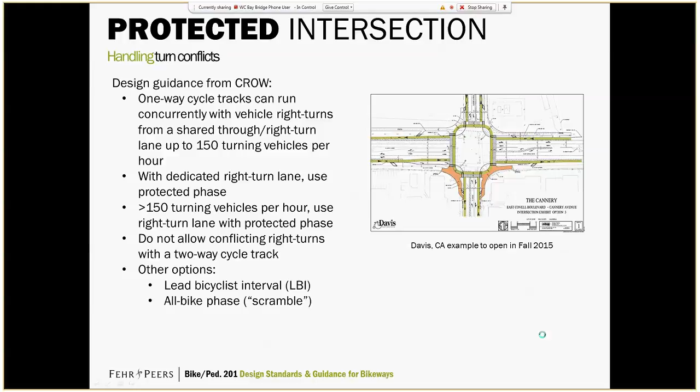That's not currently allowable in the United States. We call that a bike scramble, but it's something that has worked pretty well in the Netherlands for a long time. Dave Stanek just wrote a really great paper on this that he presented at Western ITE, and that is, I think, on its way to TRB, comparing some of the delay implications of the different ways of operating a protected intersection.

That paper is definitely worth a read if you're talking to jurisdictions about this, making sure that if you're planning facilities like this, you're evaluating the operational trade-offs and that they're going to be willing to make those. I'm really optimistic that we'll see good safety research on these and know whether or not they actually provide the optimistic safety results we're expecting, but that'll be something for the years to come.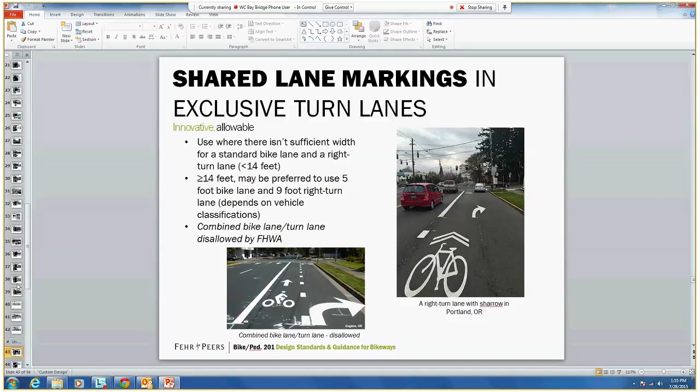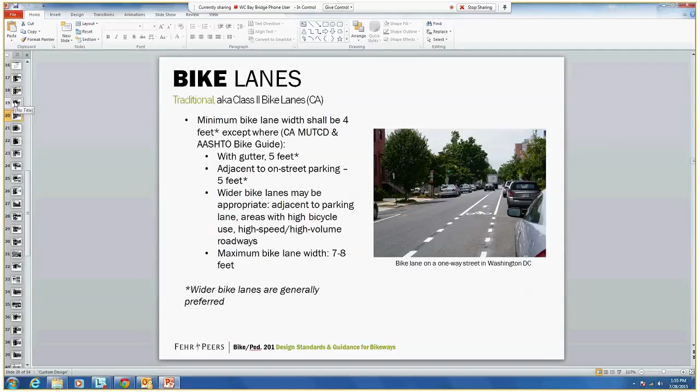I think I saw a question from Mike out there somewhere. Come on in. Mike asks, what are the recommended treatments for left-turning bikes into cycle tracks, bike boxes, or left-turn bike lanes? Ooh, Ryan, what do you think of this one?

Yeah, turning movements in and out of cycle tracks are pretty tricky. The protected intersection does help address that with the two-stage left turn, really simplifying it. If you can provide it, the two-stage left turn box is really the best way to handle that, because it's the natural way bicyclists will travel along the cycle track and then exit essentially into that left turn queue box.

Where we haven't had parking between the cycle track and the travel lane, we've provided openings so cyclists can exit and enter into the left turn pocket, which only works when you don't have parking and is also difficult to clearly communicate with cyclists. So that's not necessarily the best solution either.

I don't think I've heard of any, though there's one that's been recently disallowed. I think one of the most interesting things coming up will be to see what kind of standards and guidance Caltrans develops for what they're calling the Class 4 bicycle facility, the cycle track. They just had a summit, about 2 months ago, where they brought local jurisdictions and some consultants together and basically said, tell us what you want us to do with this, because you guys have actually implemented this and we don't have any experience with it. It's unclear where that will go from here, but they're mandated to come up with design standards. That'll be pretty interesting, because it'll fall into the standards category instead of just guidance.

The only other thing I'd add is, California specifically—I'm interested to see how the California MUTCD does or does not change its language pertaining to bike signals now that those have FHWA interim approval. The FHWA interim approval in terms of appropriate placement of bike signals is very different than the California MUTCD, so I'm just not sure who's going to trump who when they release the next version of the California MUTCD.

The challenge with all this is that the status of these devices—they could get interim approval any day, and it's really hard to know whether or not they will and when that's going to happen. So I'd encourage everybody to keep checking this website, and Caltrans has their own website that clarifies the status of various FHWA interim approvals in California. That's another resource you can look to as well.